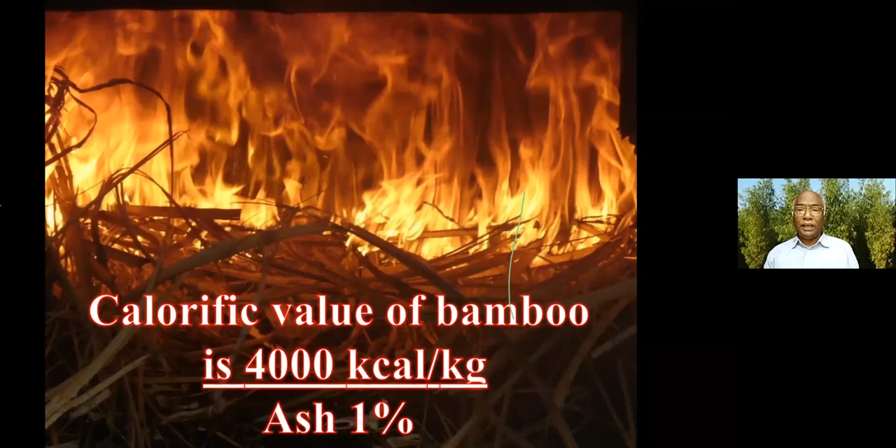Bamboo is not the only energy crop. There are many energy crops available. I've just listed switchgrass as one. People have tested and found that 17 dry tons of switchgrass are available from 1 acre. Giant miscanthus is another plant which is also used, and it can grow in a very temperate area: 19.6 tons. Guinea grass, poplar, eucalyptus. Eucalyptus we find everywhere; on average we get 10 tons per year. Whatever yield I'm giving, it's tons per year.

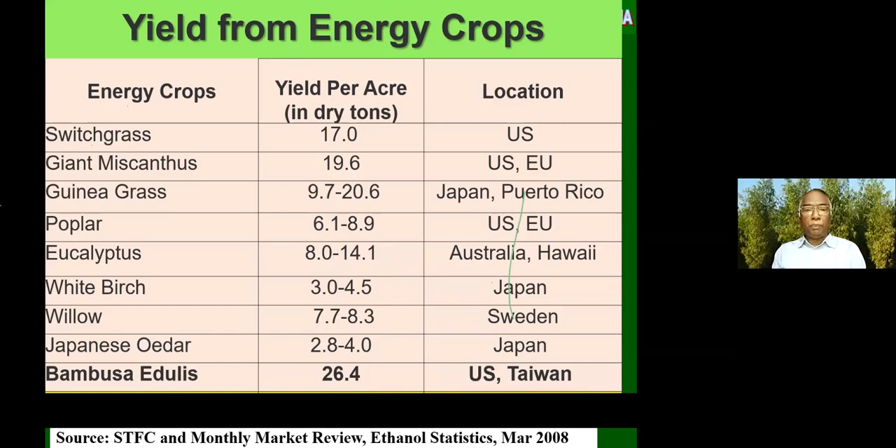Similarly, when all these were tried, bamboo was also tried. In the US and Taiwan, they tried it, and they could record up to 26.4 tons. Today, we have good bamboo. When you cultivate it properly as an energy plantation, it can go even up to 40 to 65 tons of bamboo. So that is the kind of energy.

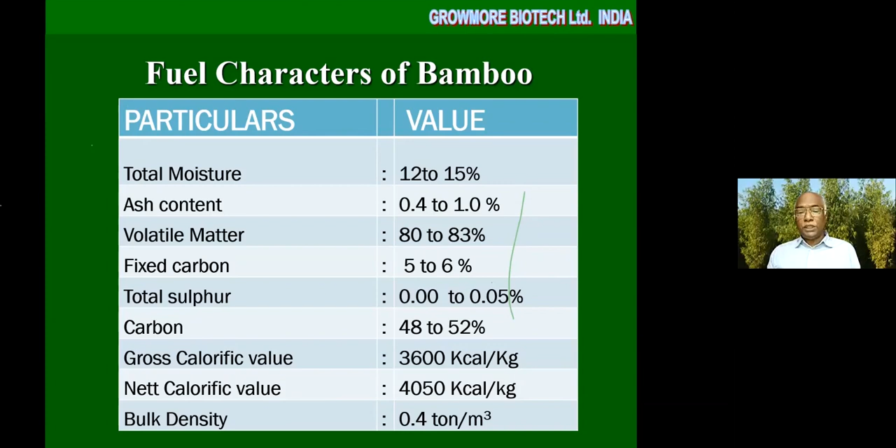What has it got? Its fuel characteristics. If you understand fuel characteristics, you'll know the volatile matter is more than 80%. Fixed carbon varies from 5 to 6%, and sulfur is literally not there compared to coal or petroleum products. The carbon is 48 to 52% in the bamboo material, which is one of the reasons it's able to capture carbon dioxide, plus an energy value of 4,000 kilocalories with a bulk density of 0.4 tons. Depending on the species, it goes up to 0.6, 0.7, 0.8.

One very important thing when people use it for energy is the ash fusion. These are the elements in the ash. Apart from that, the deformation temperature matters, because many boilers today are high-pressure boilers, for which the temperature should go higher. Bamboo can go up to 1,200 to 1,250 degrees centigrade. Even coconut shell cannot go more than 1,000 degrees centigrade. Coconut shell is a good material today for carbon and high-intensity burning, but ash fusion is a problem, so they cannot use it in bulk. Bamboo's ash fusion temperature also goes up to 1,300.

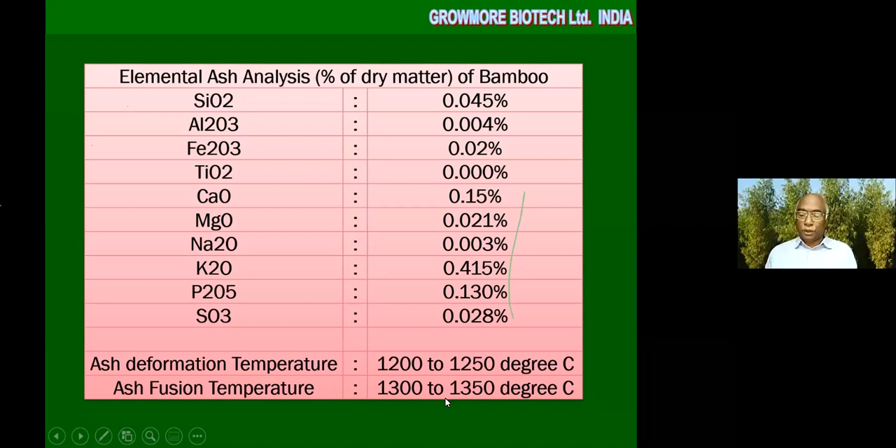Just a small table to compare: how is bamboo versus bagasse in the sugar factory? Bagasse today gives the money for the sugar factory. The money is not from the sugar; the money is from the electricity produced in the sugar factory. Then ethanol is an additional factor. Compared to bagasse, bamboo is much, much better. All the sugar factories are going to use it.

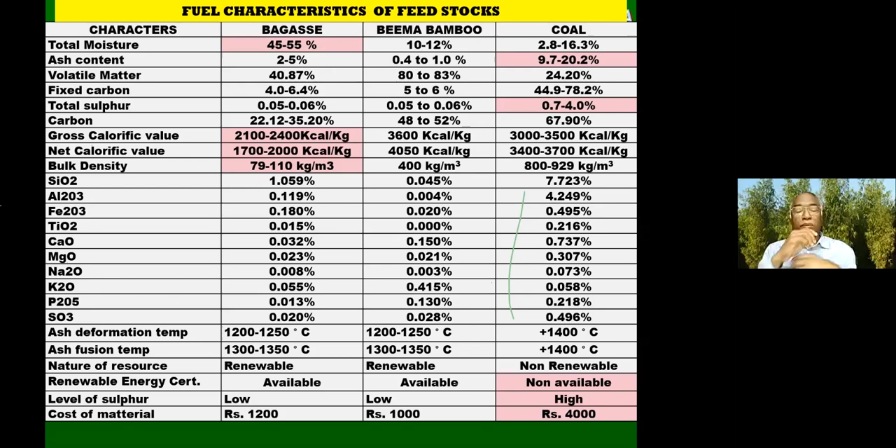We have over 550 sugar factories in India, covering over 6 million hectares of sugarcane cultivation. Most of them have cogen. What is cogen? They burn the bagasse and convert it into steam. The steam produces electricity, and then the steam is used for processing. The same thing can be done with bamboo, outside the season.

The sugar factory doesn't work for 6 months. They work only 5 to 6 months, and the rest of the time it's closed. They pay salaries, interest and depreciation keep running, and there are maintenance costs. But now Beema bamboo, or any bamboo, can be used to produce electricity during this off season.

A normal sugar factory has a sugarcane area of something like 20,000 acres to run 6 months. Bamboo needs only 2,000 acres to run the same factory for the next 6 months. That is the kind of energy density and yield coming from bamboo. That is the reason it's not far off that bamboo, like sugarcane, will be cultivated by all the sugar factories through the farmers.

Now, some of the people in Maharashtra started doing this. And the Tamil Nadu government is really checking it. The new government which has come is really looking at reviving the sugar factory through bamboo. Can you believe? Bamboo is going to be a factor to revive it. Initially they thought they could use coal, but coal is expensive, non-renewable, with lesser tariff. Now, let's go to the next one.

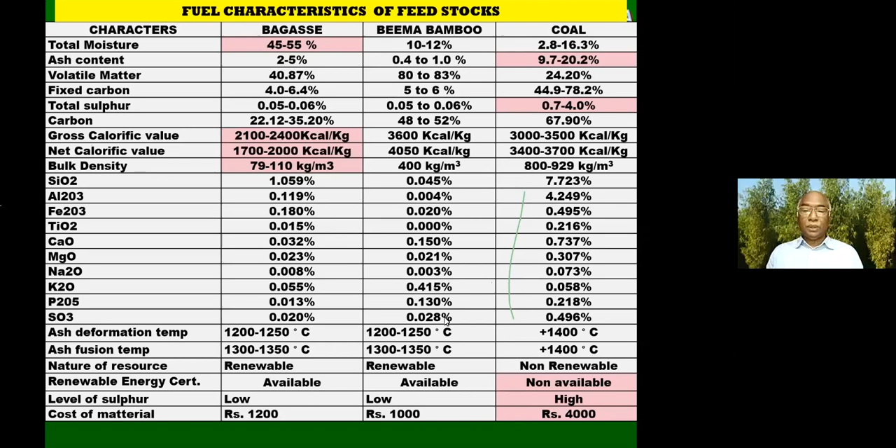Why the advantage of bamboo as a fuel? It's got a good calorific value, very low ash content, and you can continuously harvest every year. There are a lot of sterile bamboos which don't flower and die. Bambusa vulgare is one, Bambusa balcooa is one. And there are other species like stocksii also, but that's for furniture making, not for energy. And nutans also doesn't flower very often. So there are shy flowering, no flowering bamboos which can be planted, so people can continuously harvest them.

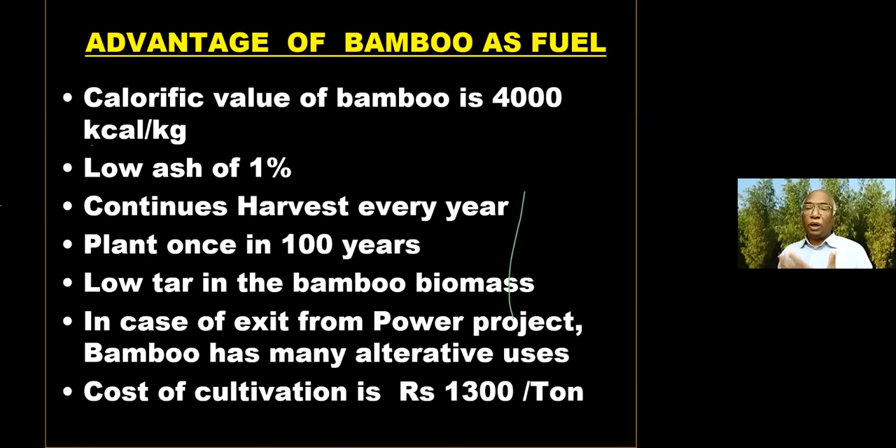Bamboo being a grass, the tar is very less. In a boiler, when you burn it, tar is another big problem. In case the energy is going to be in excess, then you have a lot of other uses for bamboo. The cost of production of bamboo is between 1,300 to 1,500 rupees per ton at the field level.

A lot of people might be asking, is this common now? Are we using it everywhere? Various industries have tested bamboo and the product is validated now. I've been working on this for over 15 years, not only cultivation of bamboo, but how do we connect bamboo to this kind of large use in industry. I know it is not that easy. I've run through all my struggle in explaining, in doing trials. Even yesterday I sent bamboo material to Malaysia for verification in a test.

Yes, there are so many things which can switch energy over from fossil fuel. Today we are using coal as fossil fuel. One ton of coal can be replaced with one ton of bamboo. That is the amount of energy which is there. One ton of coal today is anywhere between 5,000 to 6,000 rupees a ton, with a lot of ash content and full of carbon dioxide emission. When one ton burns, it would give you over 2,000 kilos of carbon dioxide emission, whereas bamboo biomass is not going to give you any.

Similarly, CNG gas, fermentation gas, or bio oil. Today Shell has been working for 15 years on converting biomass into oil like petrol, diesel, or aeronautic fuel, and they have a technology called IH2 for that. Bamboo has been tested for several things, and now they found that bamboo is an excellent alternative material, looked at very seriously to go into a large-scale commercial crop of 20,000 acres to start a project.

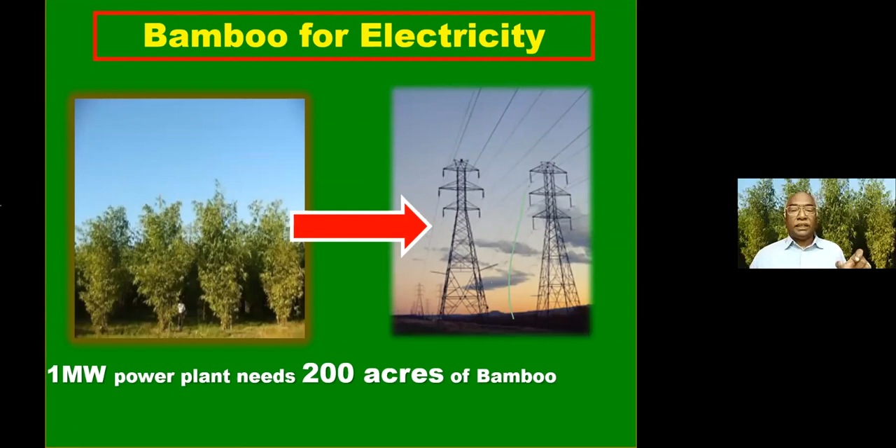From 1 megawatt, which means 1000 kilowatts of current every hour, 24 hours, for 365 days, you need 200 acres of dedicated plantation. The reason is 1 kg of bamboo is able to produce 1 kilowatt of current. 1 ton produces 1 megawatt. 8,000 megawatt hours needs 8,000 tons of wood, which will come from 200 acres of bamboo. And the ultimate cost is going to be 2.5 rupees per kilowatt, cheaper than solar panels.

And a solar panel, when you go touch it, will be very hot, up to 55, 60 degrees centigrade because of the heat of the black substance. No bamboo is 60 degrees centigrade on the leaf when it captures the energy. No bamboo leaf goes to a temperature of more than 30 degrees centigrade. They keep on cooling down, keep on releasing oxygen, and at the same time produce electricity.

The process of producing is you take the bamboo, chip it into pieces or powder depending on the gasifier requirement, and put it in a gasifier. There are several types of gasifier and pyrolysis units available in India and abroad: downdraft, updraft, side draft. There are quite a few methods available today, but let's not go into that complication. Then the gas is cleaned, and the clean gas is called syngas. The syngas has methane, carbon monoxide and a little bit of carbon dioxide, all combustible gas, which can be sent to the generator. The generator can generate electricity.

And as a byproduct you're also getting charcoal. The charcoal could be 7% to 25%, depending on the temperature or the type of gasifier you're going to use. It's variable and you can change it. More charcoal, less electricity, or more electricity, less charcoal, but you still get up to 7 or 10% charcoal. These charcoals are fantastic: charcoal of bamboo after gasification has a surface area of 950 square meters per gram. This is what the Indian Institute of Science Bangalore found after several trials, and they published it 6 years back in the Netherlands.

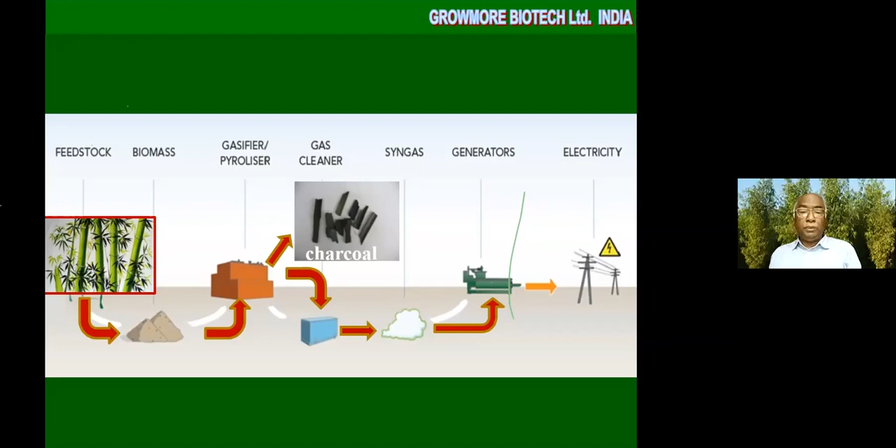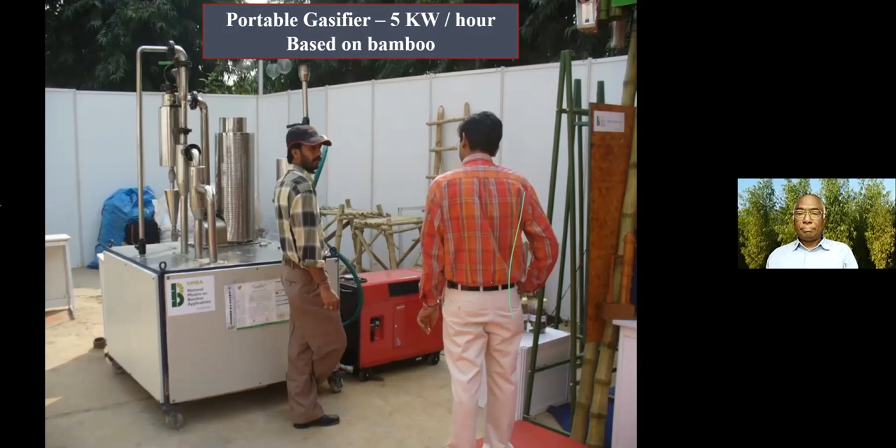This is a small portable gasifier, a 5 kilowatt gasifier, developed more than 16 years back by the National Bamboo Mission. The bamboo chips can be put in this and get converted into gas. The gas is running. The gas is producing, and this is a 5 kilowatt gasifier.

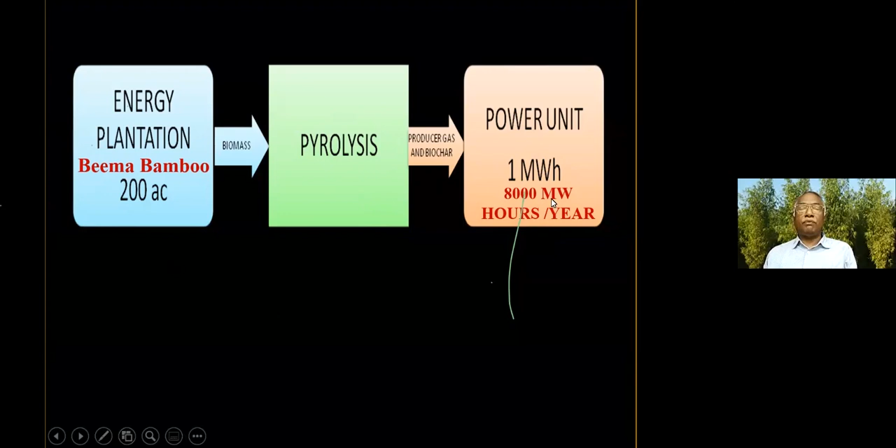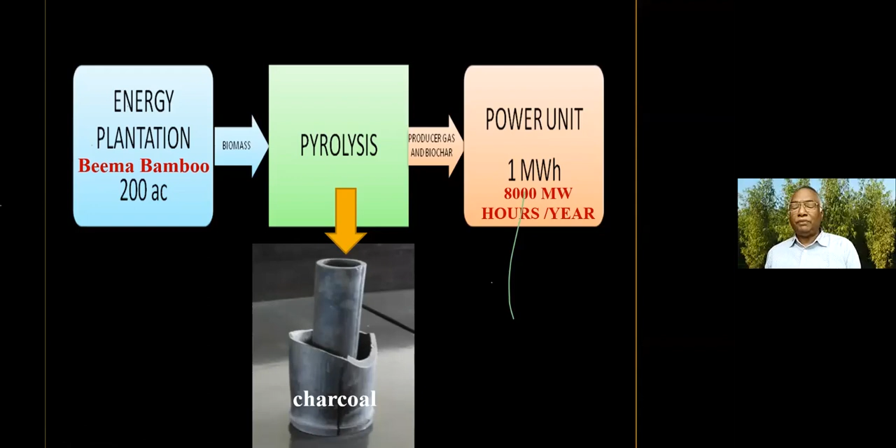So when you produce electricity, the gasifier is first, and the next stage is the cyclone stage. Scrubbing the gas a couple of times and cooling down the gas. Then moisture is trapped, then it is used in the generator to produce electricity. So this is the fundamental scheme, a schematic drawing of how a gasifier works for power application.

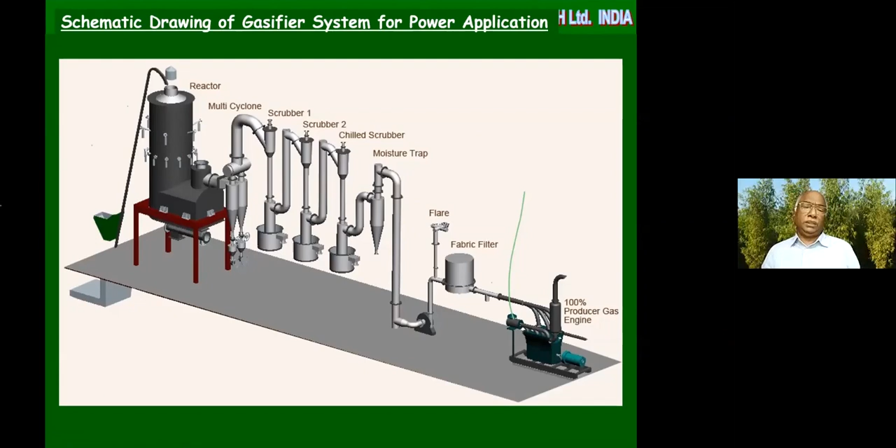There are many applications where you don't need to produce electricity. You can use the gas for heating, burn it, flame it like an LPG gas cylinder. You cannot put it in a cylinder, but you can use it directly. Today it is used for making biscuits. ITC is making biscuits in Guwahati. Over 3-4 million biscuits are made every day, and they use around 500 kilograms of bamboo every hour. It's a clean factory I've personally visited. It could also be for melting aluminium, for bakeries, even for cremation; gasifiers are used in many places today.

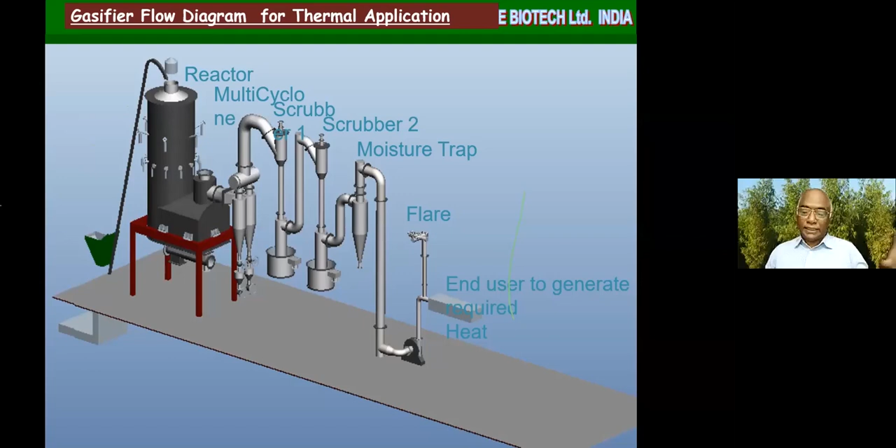Now, I can show you some examples. This is a 10 kilowatt gasifier. 10 kilowatts normally can serve 10 to 20 houses. It's portable, startup is through battery, and they can use this. The smaller the capacity, the more bamboo needed, 1.3 kg per unit. Today it's already working.

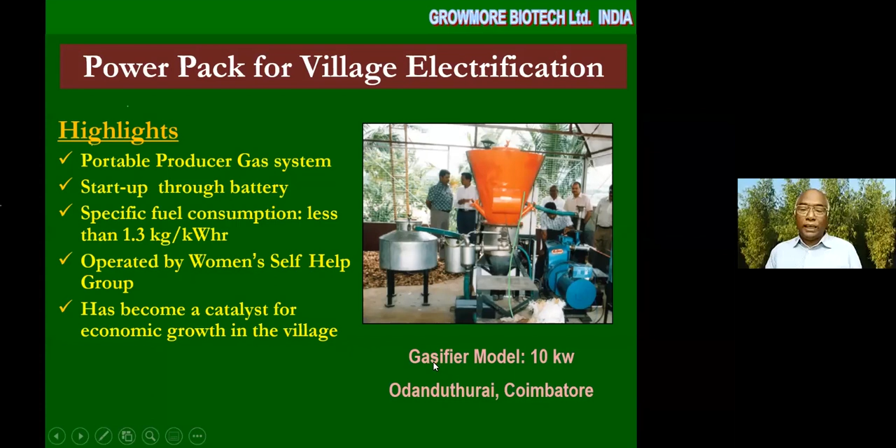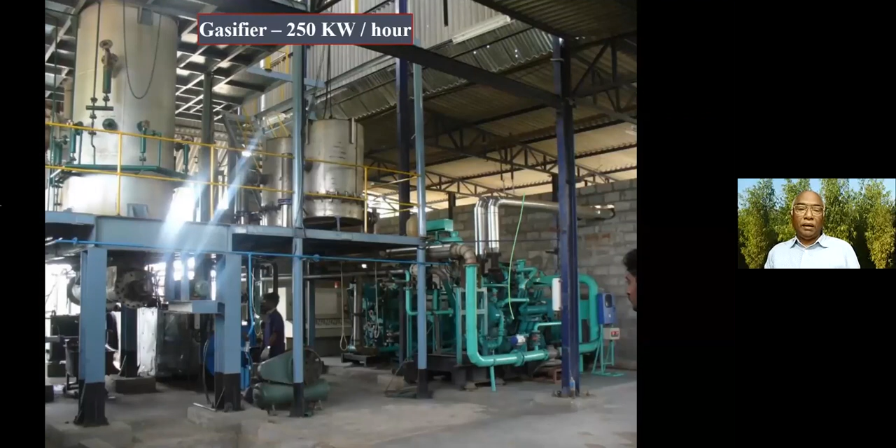It's working in Coimbatore for the last 10 years. And all these examples, whatever I'm showing, are all working for more than 10 to 15 years. This is a 250 kilowatt gasifier from Ankur. There are many companies working. Ankur has been working for the last 25 to 30 years, and they have developed a lot of appropriate technology, taking the original technology from IIT and the Indian Institute of Science Bangalore, and then modified it for practical application.

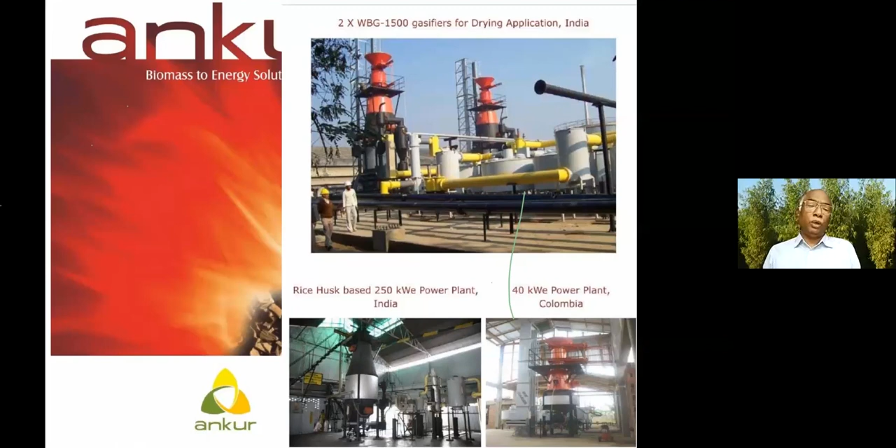Today they have, this is the top one. What you see is for drying application, 1,500 kg capacity. This is a rice husk based electricity generation one, and this is a 40 kilowatt one in Colombia. Similarly, there are many things they've done. Exclusive ones for bamboo, they've done in South Africa, and one more in Indonesia. So bamboo is used as a raw material to do that.

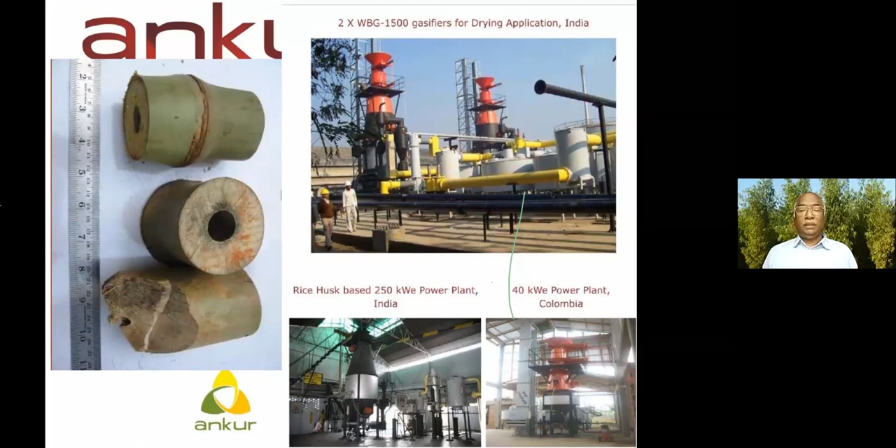So bamboo is one such biomass where the density is very high, thickness is more, and it is able to give continuous supply every year from the same field. And this is a typical drawing of a gasifier, where the hopper is, where they put the bamboo chips, everything goes inside. And then it goes through a process of cleaning and then cooling. Then after that, it goes to the series of gas engines, like Jenbacher and other people who are providing the engines, which are able to run it.

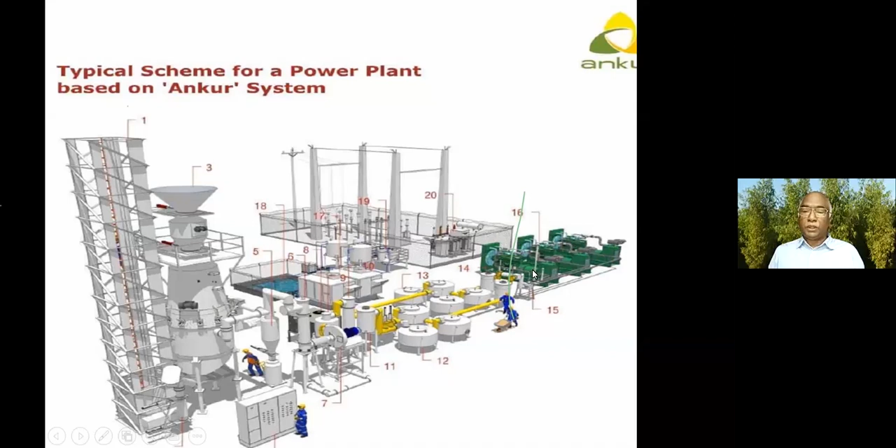This is a control panel which controls the feeding rate, production rate, electricity, everything. And through the chimney, the gas is released out. So this is something which is done. Similarly, people in Coimbatore are also doing it for the last 20, 25 years, a 1 megawatt gasifier. This is one, so clean, neat.

And they also started working with bamboo way back in 2005 onwards, when NMBA was there, the National Mission on Bamboo Application. They trialed out the bamboo, and their company is called Arashi Hi-Tech Bio Power. They have these kinds of power systems using biomass, and bamboo also could be used.

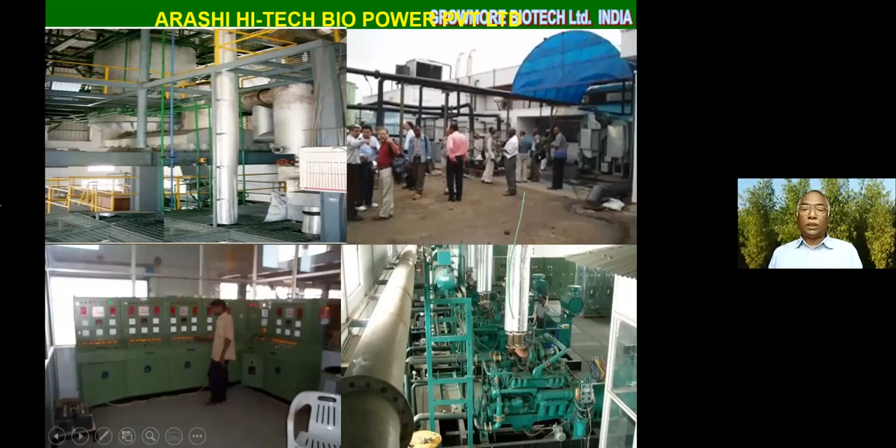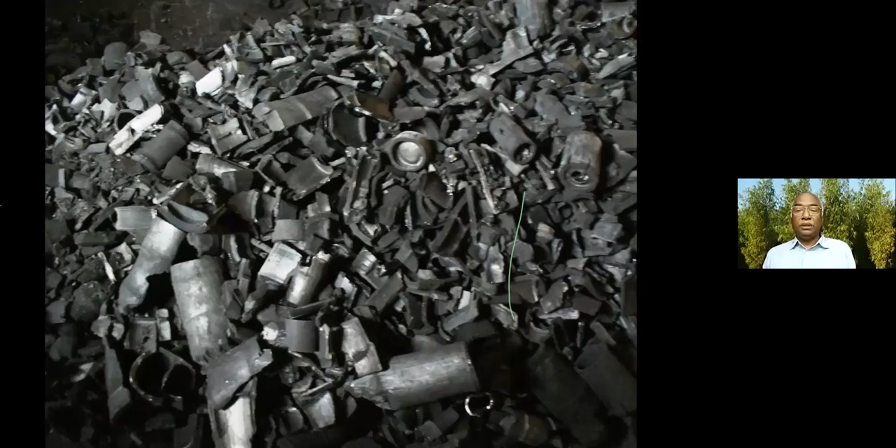I told you in the beginning, bamboo can produce charcoal as a byproduct. This charcoal is ultimately used either for burning, but that's the least value. But what could be done is it can go as carbon storage. This is what is coming in a very, very big way in future. Unbelievable, companies from Switzerland, companies from UAE, they are all talking to me. Can we grow bamboo, convert it into charcoal, and bury it in the ground to capture the carbon dioxide? This is a permanent sequestration of the carbon.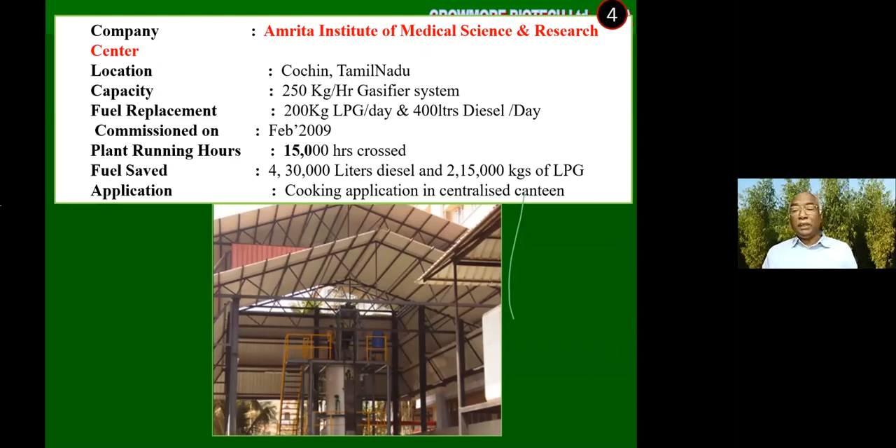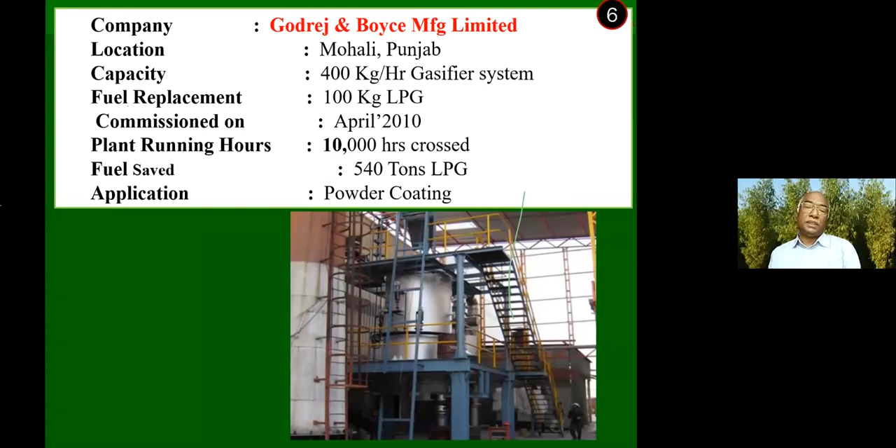And people with big kitchens are using this kind of one, and powder coating. And Godrej and Boyce, the industry, are also using this, and already 10,000 hours crossed, and the fuel saved is 540 tons of LPG. And I can keep on telling you, there are so many such gasification-based industries running now. People are using it. This is the Tuticorin one for titanium extraction.

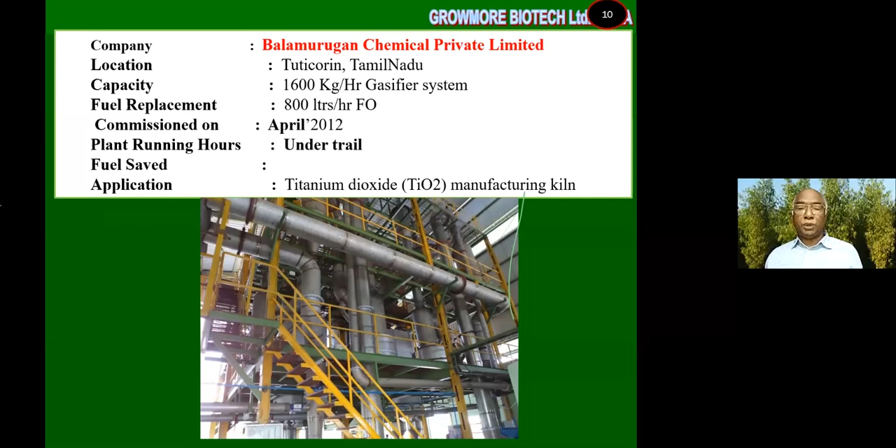Everybody needs heat. And the heat can come by burning. But when you go through gasification, we are able to get completely controlled heat and also no emission, no carbon dioxide emission. Instead, the carbon comes out as charcoal, which is sellable. And this is also a unit developed by them with rice husk, but this can also take bamboo chips. This is a 700 kilowatt one in Cambodia.

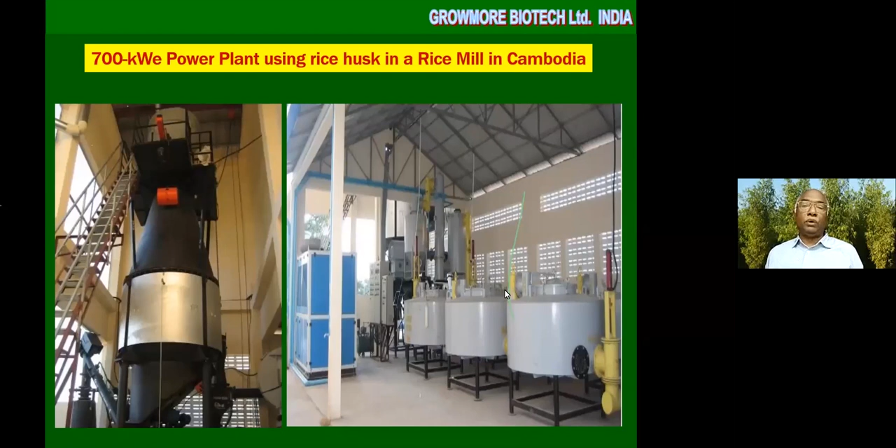This is their plant and the gasification plants. And this is the gasifier. And it's doing wonderfully well. So for 1 megawatt power, you need 80 hectares or 200 acres of bamboo plantation. This is just to break the monotony, I'm just putting a small video.

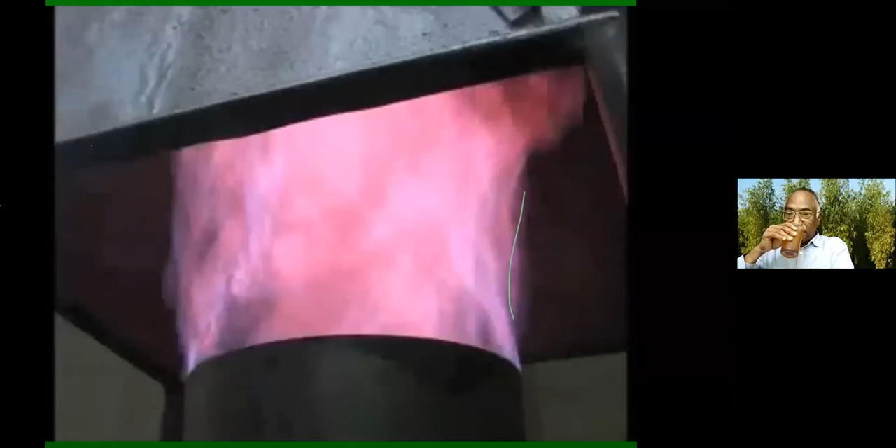Nature has a wealth of untapped energy resources. Bamboo has been recognized as a renewable source of energy. Bamboo, the fastest growing biomass, can confidently be associated with the development of the energy sector in India. There are two ways in which bamboo gives energy. First, by conversion into charcoal, and second, by gasification into producer gas as a source of thermal or electrical energy.

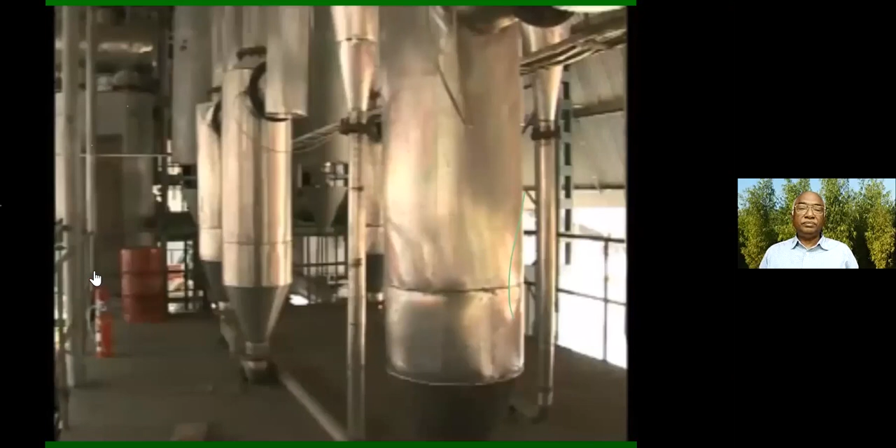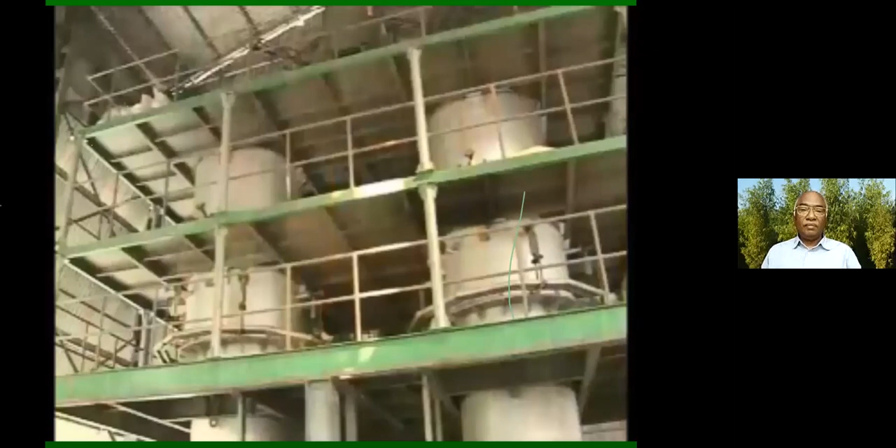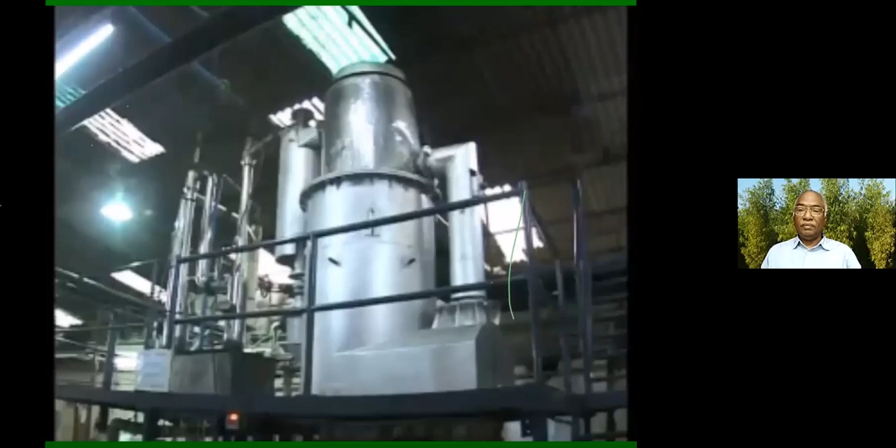Bamboo gasification is emerging as an excellent option for electrical application. Bamboo-based gasifiers have now been commercialized and are available in capacities ranging from 10 kilowatts to 1 megawatt. Biomass is converted to energy by the reaction of the raw material with oxygen and steam. The biomass is fed to the reactor where it reacts with oxygen and steam in a high energy combustion reaction.

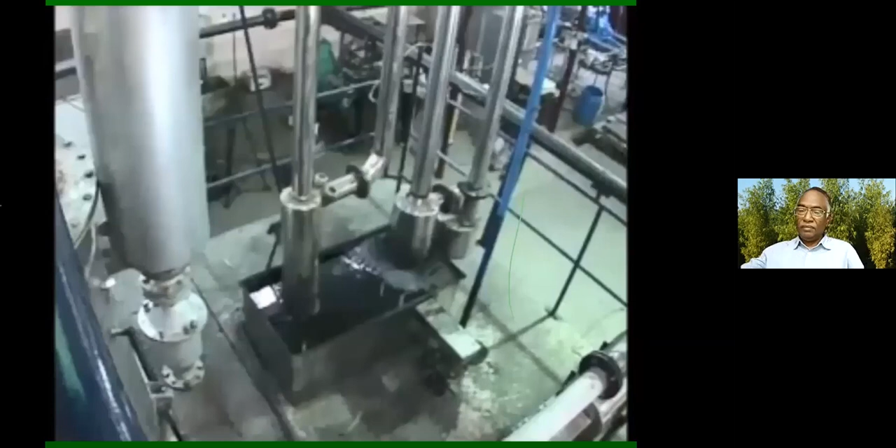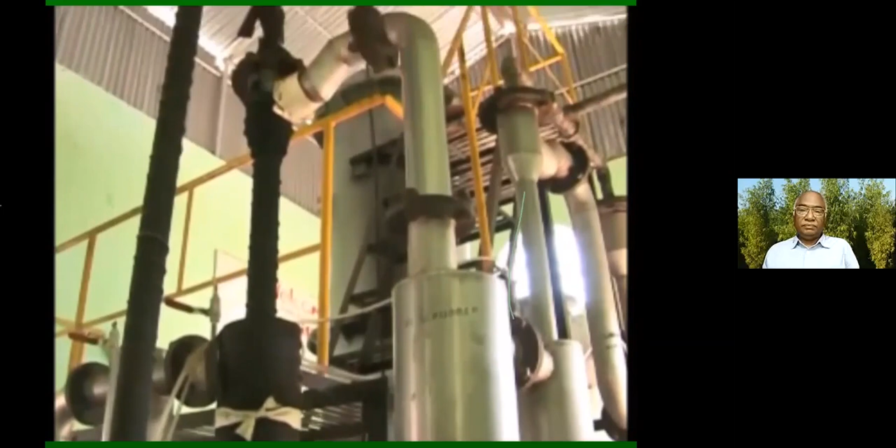The technical feasibility of using bamboo in biomass gasifiers has been tested and validated by the IISc Bangalore. Like any other biomass, bamboo is also an excellent fuel for gasification. Two 1 megawatt gasifiers have been set up at Cachar and Nagaon units of Hindustan Paper Corporation in Assam and one 100 kilowatt gasifier at NBDA, Nagaland. Further, nearly 20 gasifiers ranging from 25 kilowatts to 500 kilowatts capacity have been established.

Bamboo renewable energy is all set to assume the role of a catalyst in rural and industrial development of India. A national level program can fill up a new life in these exciting sectors and lighten up our villages in the most natural way.

So, bamboo is coming up now in a good way in India, but much better than that is in a place like Africa. We are writing a report for them to include bamboo for all these kinds of energy sector to be used throughout, because hardly around 6 to 7% of people are getting electricity.

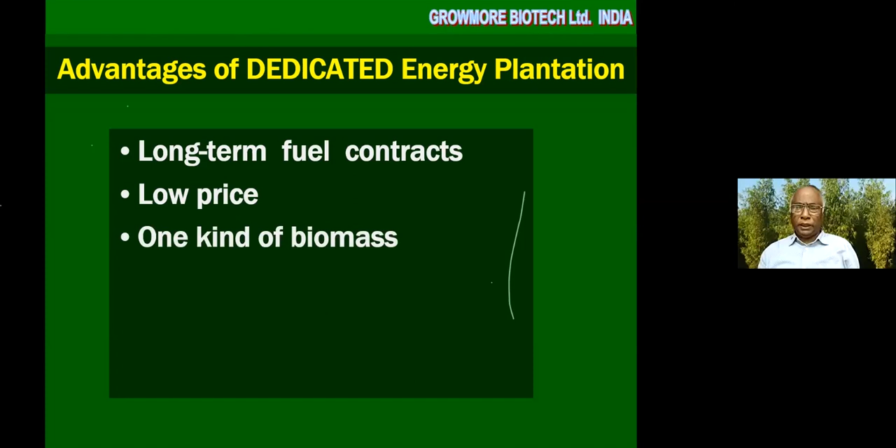The advantage of bamboo being a dedicated energy plantation is you get the fuel continuously. The price is very low compared to all other biomass, and it's only one type of biomass, so your boiler could be organized in such a way that it can fit into this, and supply is assured and adequate supply is possible, and it is available from one single place when you cultivate it. Otherwise, you have to go collect from a lot of places and bring it.

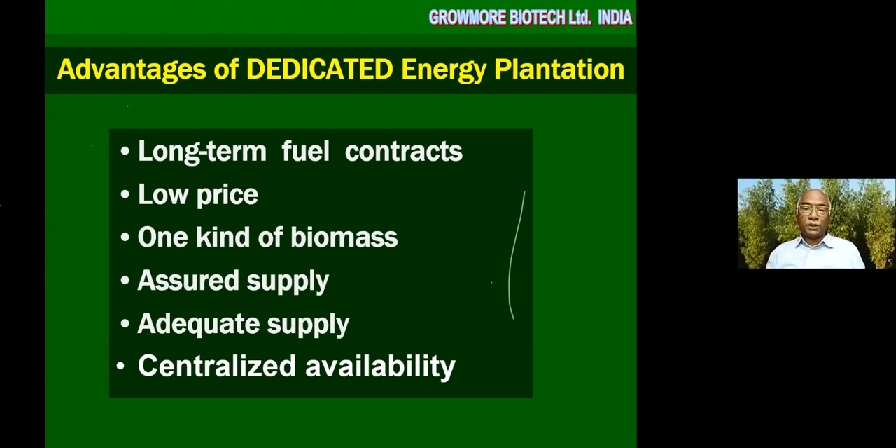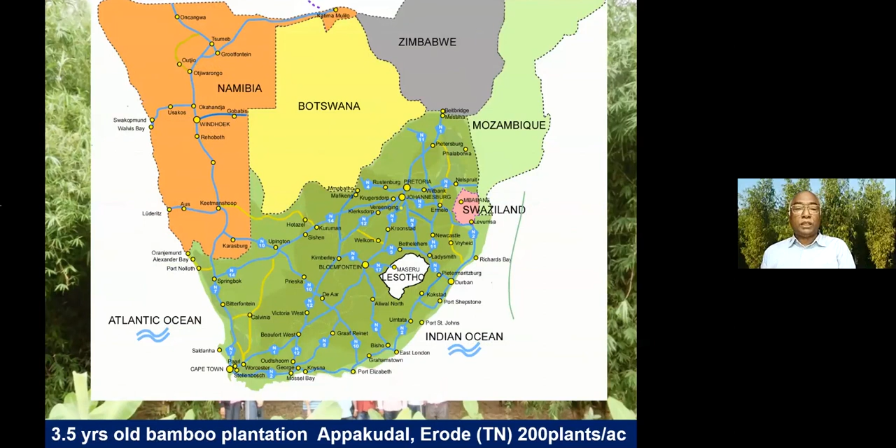Now, what happened around 7 years back? People from South Africa came down to India. They have seen all these plantations. Whatever people you see in this, all are South Africans, except these two persons who are from India. And they have seen this growth of the bamboo in a place called Appakudal near Erode. And they went back to South Africa and recommended to the government, and the government sanctioned the first national demonstration project of converting bamboo into electricity in 1,250 acres.

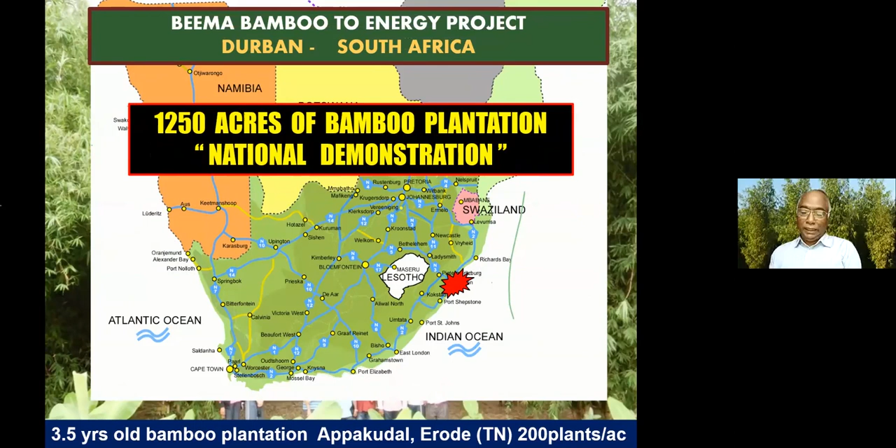And for this the plant has gone from here, the technology has gone from India, and even the gasifier has gone from India. And then they have established it and they are doing it. Similarly, there are big units coming up based on bamboo. There's one in Sri Lanka, which is in 2,000 acres for 10 megawatts. They got the approval, but because of corona, it's all getting delayed now.

And not only bamboo into electricity or into charcoal. The one which is talked about today is ethanol. Bamboo is a good fuel. And in India, we have reached a level of blending. Actually, all our petrol is blended with a small quantity of ethanol. We started with 3%, and this year we reached 5%.

And a country like Brazil has gone even up to 85% ethanol, only 15% petrol. It's the other way around. India and Brazil have the same problem. They are importing the oil. The cost is very high. The dollar value is going up because 50% of our export earning is spent only on fuel import, like coal or petrol or crude oil. So they are converting sugarcane into this, so they have gone to 85%. I'm very happy that in Nagpur there are buses running which are 100% ethanol buses.

So bamboo is a highly potential plant because it's got lignocellulosic material, which is composed of cellulose and hemicellulose. This cellulose and hemicellulose is convertible, digestible into ethanol. This is a 6-molecule one. It can be converted to a 5-molecule one, and it is a matter of time. Initially, you have to pre-treat it, and the pre-treatment could be heat, it could be steam, it could be acid.

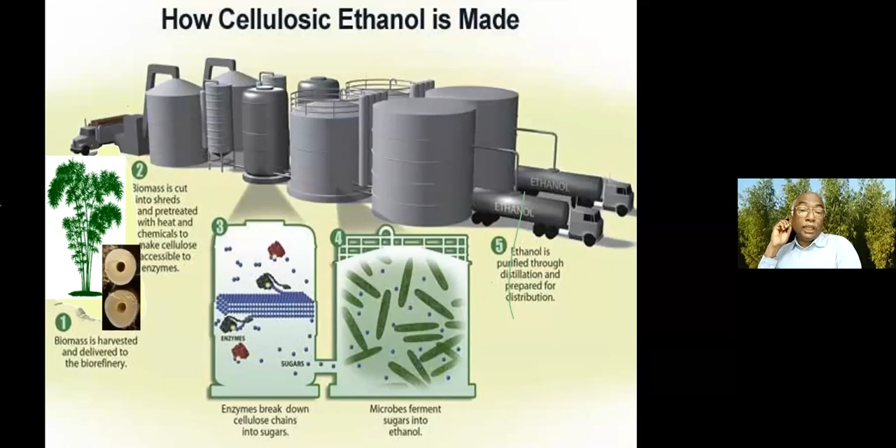The cellulose is converted to starch with the help of enzymes. They break it down. After it is broken down, it converts into sugar, and then into ethanol with the help of microorganisms. Now, all these processes take something like 1 week. For the first batch, when you feed it here, by the time it travels through, today's technology is 1 week. Maybe in the days to come, it's going to keep changing. Right now, I sent this bamboo around 7 years back to Italy.

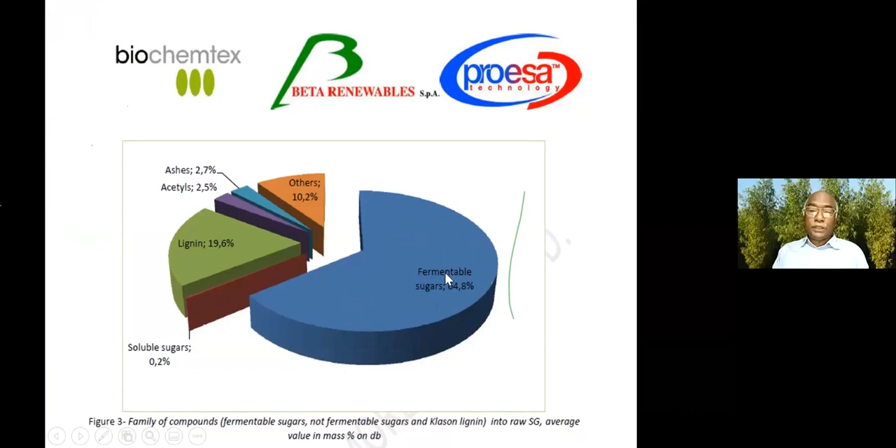In Italy, there's a company called Beta Renewables, and we checked what this bamboo has got. I've been working on bamboo, Beema bamboo, you all know that, so I was exploring it very deeply. When I gave it to them, they said 64.8% is the cellulose available in it, fermentable sugar available. Lignin, nothing could be done with that, but it can give byproducts, so other products are also there. This is what is very important, which is able to get converted.

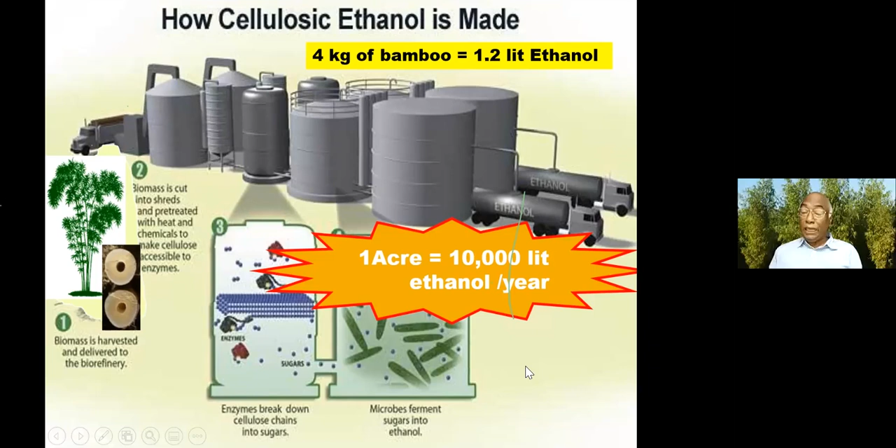So 4 kg bamboo is able to produce 1.2 liter ethanol, or 1 kg ethanol, which amounts to almost 10,000 to 12,000 liters per acre. Mind-boggling number. If you look at the other options available, there is sugarcane. 40 tons of sugarcane is converted into 4 tons of sugar. After the 4 tons of sugar, we have molasses left, around 1.5 tons per acre. That 1.5 tons of molasses, when you ferment it, gives 400 liters of ethanol. And that 400 liters of ethanol is used for consumption and industrial use, and only a small quantity comes for fuel.

Now, go to the US. The US does not have sugarcane, only a very little quantity in Texas and tropical Florida. But other than that, they have a lot of starch from corn, wheat, grain, rice and potatoes. The starch is converted to sugar with the help of enzyme treatment, and then it is fermented with the help of microorganisms to convert it into ethanol. Coming back to bamboo, bamboo does not have any of this. It is more of cellulose. So no starch, no sugar. It is not an edible one that you're going to divert. So today I'm recommending African countries not to go for food material, go for bamboo. Bamboo avoids the chain of food versus fuel.

So what is happening here is you don't have starch, so cellulose is converted to sugar to convert to ethanol. This is science. Somebody can develop it and show you. Once done, its job is done. What is very important for people like us is the efficiency of 1 acre. How much ethanol can 1 acre produce if I grow sugarcane, if I grow corn, if I grow bamboo? That is what is very important, and that I will show you.

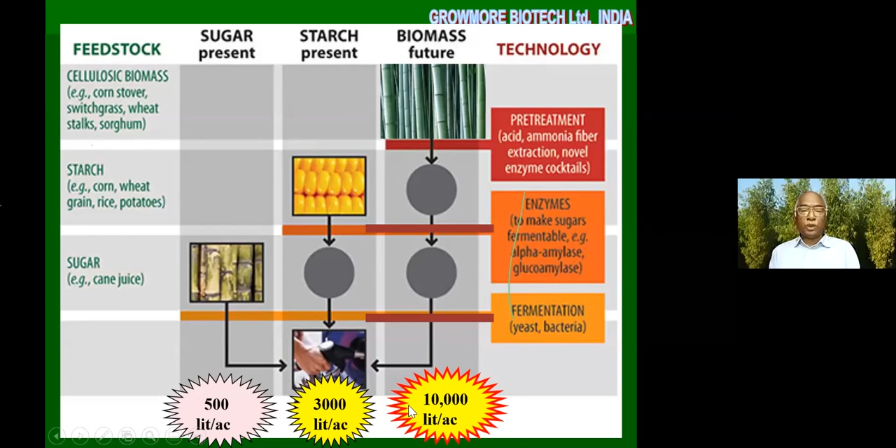This is 500 liters per acre, actually 400 liters. And maize is harvested 3 times: 1,000 liters each gives you 3,000 liters, much higher than this. But if you use all the sugarcane juice also, you'll be able to get 2,000 to 2,200 liters. Still, corn is better than that. But it is 1G ethanol, where you need a lot of investment and machinery. Similarly, bamboo gives 10,000 to 12,000 liters with present-day technology. I'm very sure in another 10 years, this will increase to 18,000 liters with better enzyme intervention. This is where the highest efficiency is going to come from.

We did not have the technology when Bharat Petroleum wanted to start one in Numaligarh. So they had to go all the way to Finland, sign an agreement with a Finnish company, and get the material. They started with 60 kl, but as they went on, they have now come to over 1.8 lakh liters, 180 kl per day.

Now, the process is simple. Grow the bamboo, cut the bamboo, do the pre-treatment, and after pre-treatment, size them for application of the enzymes. There are 3 types of reactions that take place. It could be done either in stages or together. After that comes distillation and separation of the material. When you separate, you get wastewater, you also get ethanol, and you also get lignin, undigested material, which is used for burning.

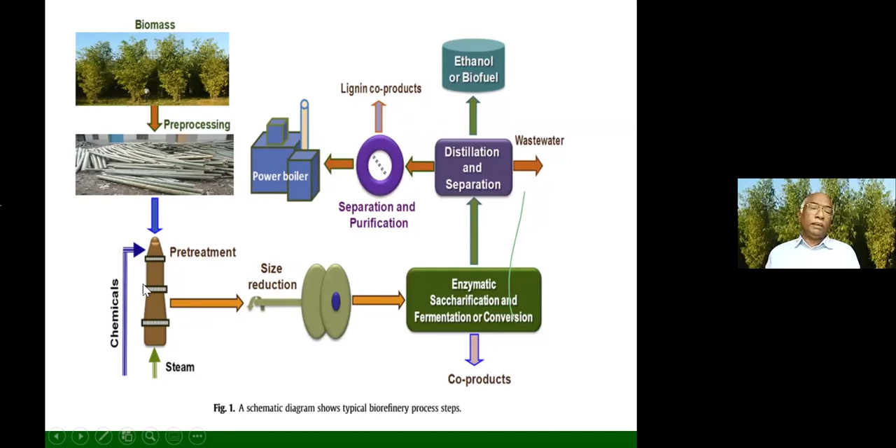It is converted to steam, and the steam produces electricity, another 20-30 megawatts. That is also used for this ethanol process, and around 30 to 40% of the electricity is exported. And the steam is brought back to cooking the bamboo when it comes inside. So the complete cycle is filled here, and bamboo is able to do a good job of this.

Now, the latest technology is to convert bamboo into petrol and diesel. That is the latest one. Like gasification is the process where you stop with the gas. Now, the same gas is also done in a hydrogen environment. This technology is patented by Shell, and they have the unit in Bangalore in India. They have done this with all types of biomass, including bamboo biomass.

This is hydropyrolysis, where the pyrolysis is done in an environment of hydrogen, and then the charcoal comes out as a first product or a byproduct. The main product comes when the gas is passing through the reactor; based on the catalytic agent in the reactor, it's converted either into gasoline, a petrol, or a jet fuel, or a diesel, or even a kerosene. Whatever you want, you will be able to do that.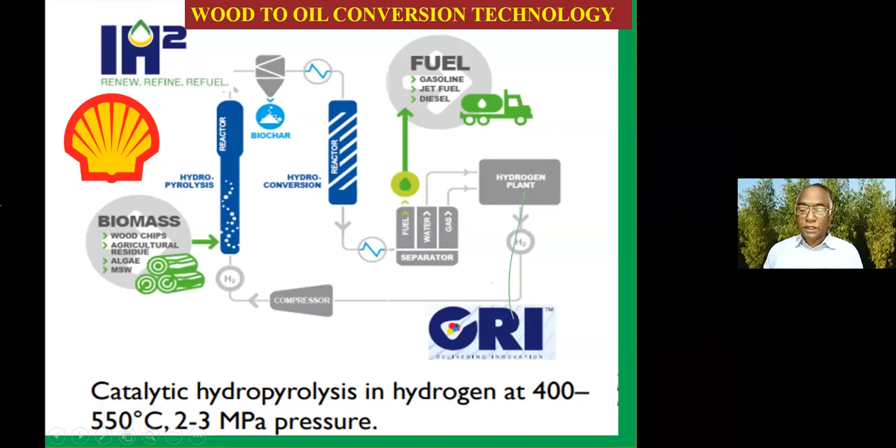And whatever emission comes, the water vapor, goes to a hydrogen plant. The hydrogen plant is able to convert it into pure hydrogen, compressed and sent again into the hydropyrolysis chamber. So everything is used, and the entire process takes place at a temperature between 400 to 550 degrees centigrade. Now, this is the model plant in Bangalore. Shell is able to do that.

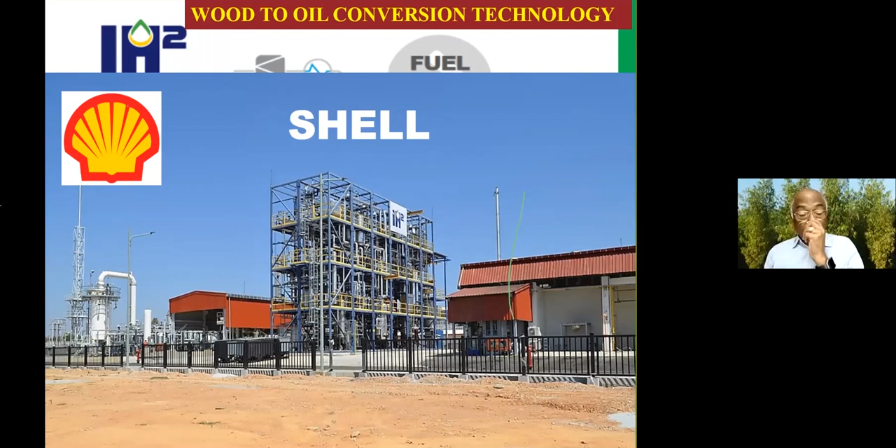And they are also likely to go in a very, very big way. Several units are going to come, both in India and abroad. They are looking for collaborations and cooperation with the farmers or with the forest development corporations and all that. So this is going to bring real biodiesel.

The quantum of biodiesel from Jatropha was around 400 liters per acre. But from bamboo, it will be 10,000 liters. So everybody is going to benefit: the company like Shell, the manufacturer of petrol and diesel, the user, including the farmer. Everybody in the chain will benefit. Plus, carbon emission is reduced and oxygen is released.

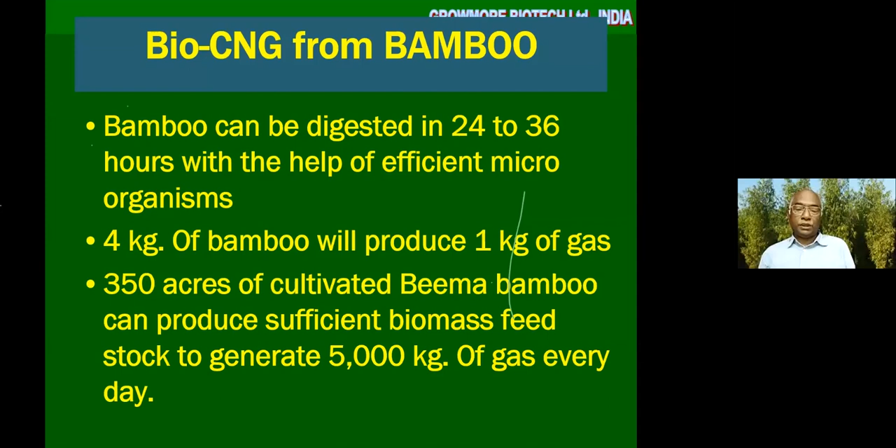Similarly, bio-CNG: a lot of attempts are being made by many people using microorganisms. They're able to convert 4 kg of bamboo into 1 kg of gas, and for that you need around 350 acres of cultivated bamboo to produce sufficient gas of 5,000 kg, which today is an economically viable size. This plant is in Pune, and Santosh Gondhalekar has done a lot of work on this.

He has used several types of biomass because of the shortage of biomass and some complications. He's still not gone totally into bamboo, but the days are not far. With this information, he's going to do that. And this is the bunk which has been distributing the gas for a long time. Again, 4 kg of bamboo will be able to produce 1 kg. 1 acre can produce 4,000 to 5,000 kg per year.

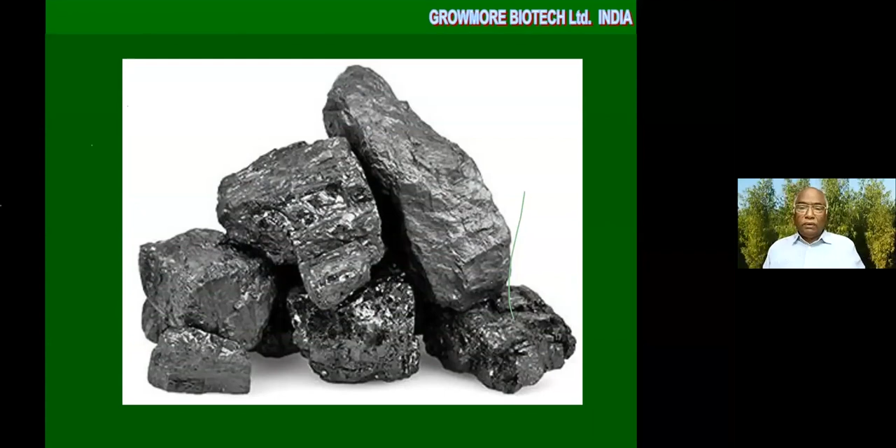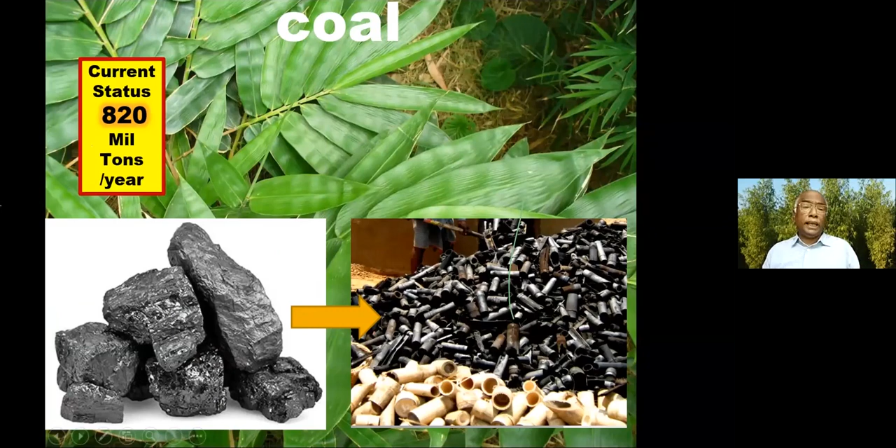So these are all highly complicated. Let's not go into the conversion and all that. If you want to replace coal, bamboo can simply be converted into coal, either by charcoal or torrefaction. Torrefied bamboo is also sufficient. Today we are using a huge quantity of coal in India, around 820 to 900 million tons. Out of that, 200 to 220 million tons of coal we import every year.

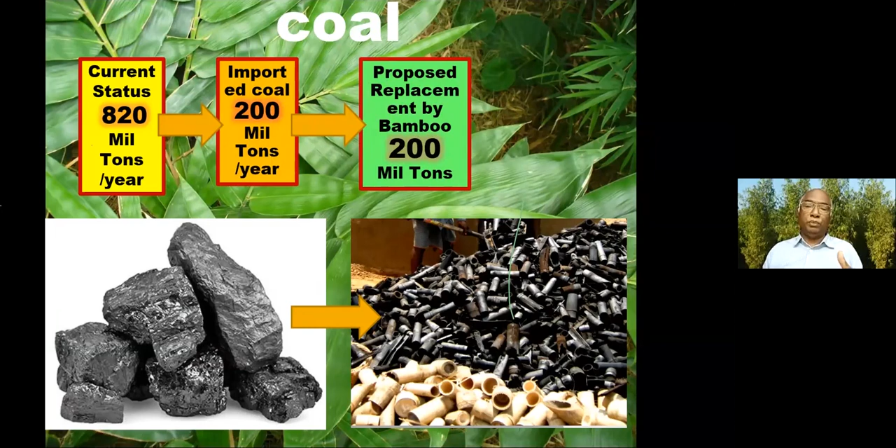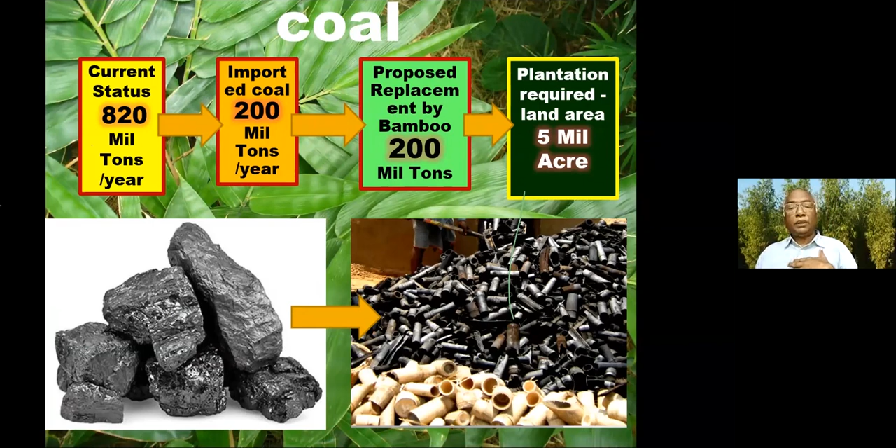This imported coal is equivalent to 200 million tons of bamboo, which will come from an area of 50 lakh acres. 50 lakh acres we need only to replace coal. But this market has to be really explored. I've been pushing it to happen, and I'm very happy that Dalmia Cement came forward 3 years back. They started using it. Now, Northeastern factories are using bamboo as an alternate fuel in the cement industry. Ultratech has come forward, JK has come forward.

Over 20 cement factories have planted bamboo now, and this is going to increase to at least 100 in another 2 to 3 years' time. Then they will also look at tying up with the farmers. Why are they doing it? Because the carbon footprint of cement is very high. 1 ton of cement produces 612 kg of carbon dioxide. India is a little less, 579. Dalmia Cement is less because of their efficient operation, 493.

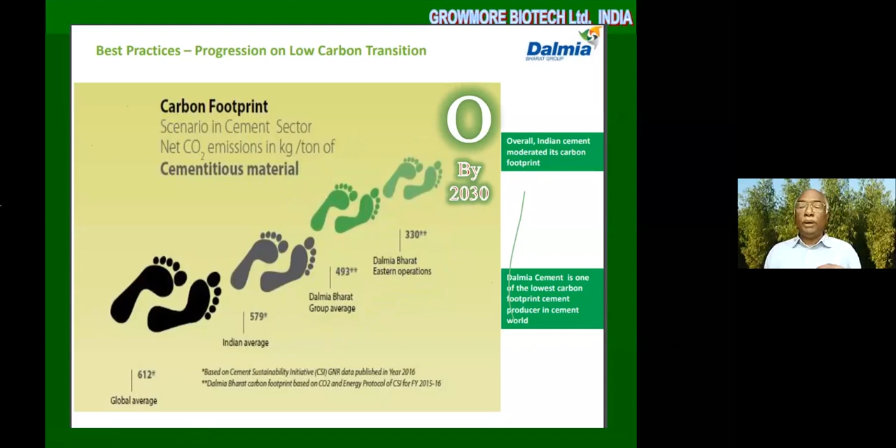In their northeastern operation in Meghalaya and Assam, they have a plant whose emission is only 330 kg, which is half of the global figure. Now they have taken a decision to become carbon net zero by 2030. In 10 years' time, they'll become zero. For that they are going to do a lot of work with bamboo and other material. Bamboo is going to be the major input. So bamboo is coming as a carbon farm to reduce carbon emission.

That is what is going to come in a big way. So bamboo has to be cultivated for that. You cannot simply collect from the forest and do that. We know how to cultivate sugar cane. Bamboo should be cultivated as an energy plantation, properly grown. Nutrients should be given. Fertilizer should be given. We should not be taking it with a little less care, like what we have been doing in the forest for the bamboo. It should be really cultivated like a broiler chicken or a Jersey cow. Then it works for this, and it is able to give you a huge quantity of material.

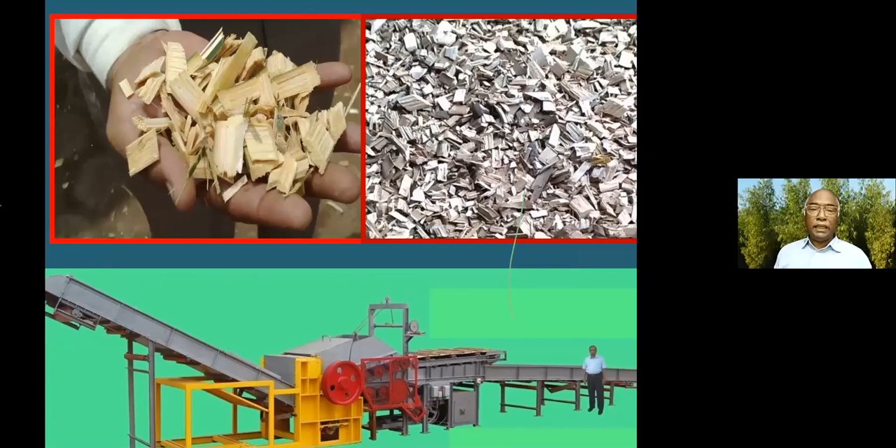And long time back, we have checked this, and bamboo as a raw material can go as a chipped one. Bamboo has to be chipped. When it is green, it's easy to chip, and then dry it, and this becomes raw material, and that raw material can produce electricity, leaving the carbon back.

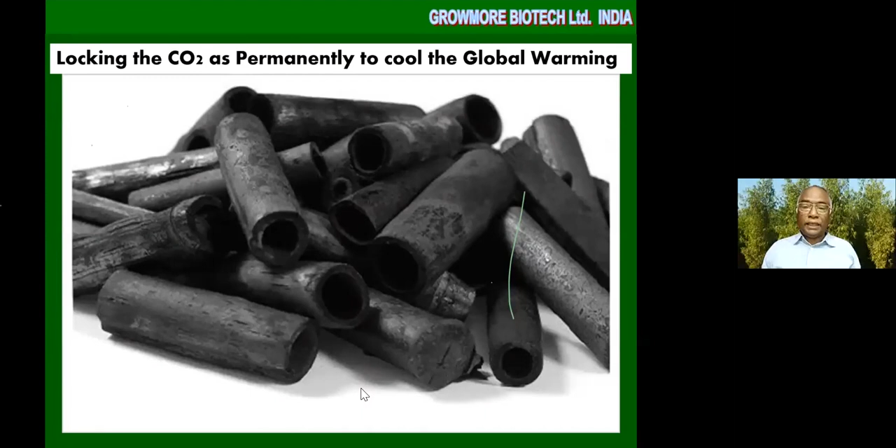Today, please believe me, there's a huge group of people, a market coming up for converting bamboo permanently into charcoal, which will be put into the soil to cool the global warming and get the carbon credit for this. A lot of people from abroad are talking to me, the companies are doing this. This is going to be the next future industry, where while doing it, you also can get electricity, or you can simply make the charcoal and give it to them. And this is a marvelous thing to happen.

But I looked at what is the market for all this. If we keep on talking and doing this, do we have sufficient market? So I converted them to area, how much area we need. All put together, it's something like 2,400 million tons of bamboo we need. Just for ethanol alone, we need 190 million tons, for blending 20% in India. For electricity, we need 908 million tons to replace the coal. And bio-CNG, 136 million tons. All this put together is such a huge quantity.

When I convert to the area, it's more than 60 million acres. Oh my God, huge. It may not happen today. It will take another 30 years to get implemented one by one slowly. And this 60 million acres is 5 times more than sugar cane. Today, 12 to 13 million acres of sugar cane is there, and imagine that 12 million acres is controlling the political lobby. Now think of bamboo, how it's going to be. So the future is going to be for bamboo.

Bamboo is the next technology to dominate the future, like how the cell phone dominated, Amazon is dominating, Uber dominated. Similarly, Patanjali immediately came and became a product of the common man. Similarly, bamboo is going to be the next disruptive technology to dominate the future. I know many may not agree with me, but I believed 15, 16 years back. I dedicated myself totally to this, underwent losses, but today we are really able to see the future coming very close. A lot of foreign companies are looking at it.